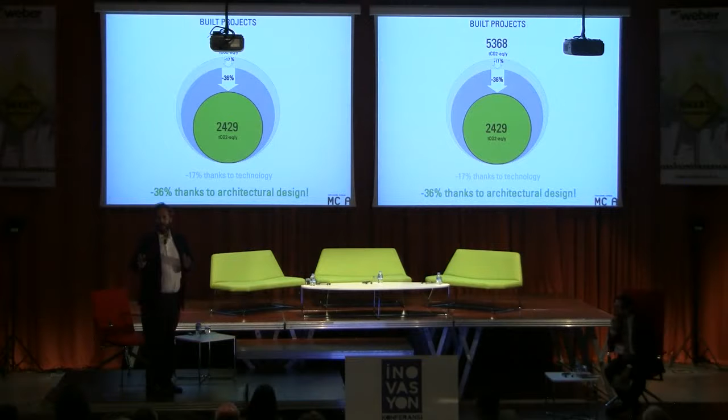Remember how buildings were built in the fantastic period of 1980? Architects completely forgot the knowledge of how to build in relation to climate, because the dream of technology was that you could put in an air conditioning unit and have any kind of climate you want inside, whether outside is hot or cold. Architects in that moment lost 1,000 years of knowledge of building in relation with climate. Totally lost. And the result was a very, very expensive bill in the last 30 years, because buildings are unsustainable.

In the work we did in the last years, I tried to define a few things. Creative empathy was a very important key for me, because with empathy you put yourself in relation with a place—you try to understand where you are, what you're doing. Creativity is a tool, very important, but be careful, because creativity can become extravaganza, strange things, and we don't need this. We need a very high quality in creativity, but we need this creativity to be very empathic with the place.

So we define three elements: low-tech, high-performance building; bellezza, which is—I'm sure you know Italian—beauty; and vernacular innovation. This is another key point for me. Vernacular innovation is a paradox, because you say vernacular architecture, what do they have to do with innovation? I'm going to show you something very interesting. And building as a catalyst for social change—so the responsibility of architects in relation to social change.

In terms of what I call low-tech, high-performance, these pictures show exactly what I'm looking for. You can see this is a guy walking with a camel, but if I change the point of view of this picture, this is not only a guy—this is a doctor with a GPS antenna for satellite connection. This is a PV cell, photovoltaics, to produce electricity for a battery, and the battery supplies energy to a fridge. This is a combination of what I like to think will be the future of innovation.

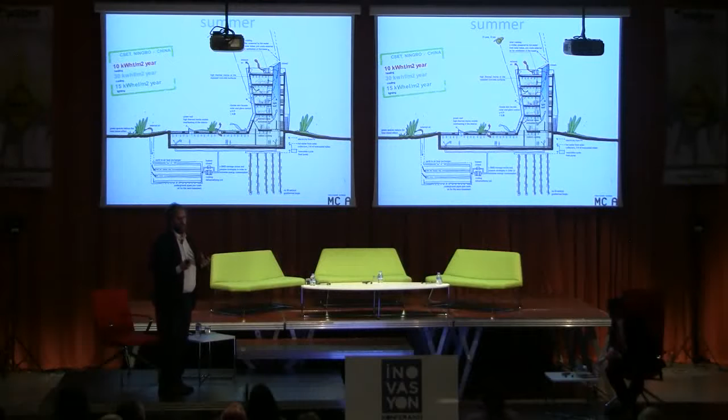And the floors, because we want to create this stack effect, this chimney system. In the summer, we're dehumidifying the air, bringing it in, and the cool air comes in and goes inside the room and out of the windows, and we're using the thermal mass of the building, using low temperature to keep the building safe in terms of temperature around you, and using ventilation.

And of course, in the wintertime, we always want to use thermal mass in the floor, invisible. Using the system of ventilation, because we're using the hot air on the double skin, cross ventilation, and using this as a chimney, and the same technique on the floor.

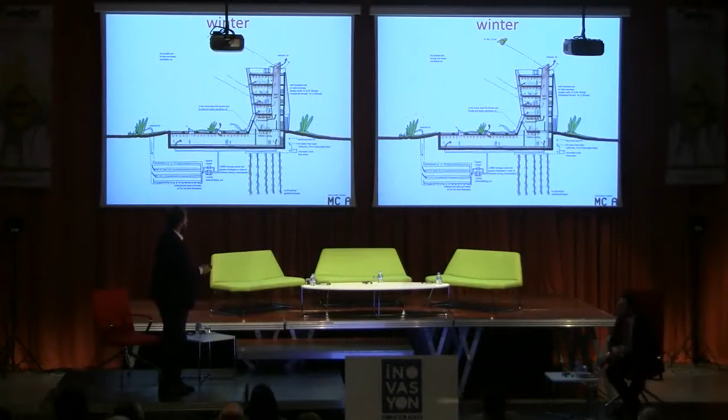And this is done in China, one of the fastest economies on the planet, to show that if you want to do sustainable building, you need to start first thinking about which kind of technique combines with the climate. And of course, the shape of the building matters quite a lot.

A few years before, I did this for the Minister of Environment in Italy and the Minister of Science and Technology of the People's Republic of China. I presented this as my building. This is the building, it's leaves looking on south.

The first sketch was done to show that this is a building facing south. We are in Beijing. Beijing has a very, very cold and dry weather in the winter, and is very hot and humid in the summer. So in the wintertime, we want to keep the building protected from the north, from the wind coming from the Gobi Desert.

So the north face of the building was a wall, like a shoulder, and the south was like steps with gardens, open to the south to get as much sun as possible in the wintertime. And of course, we worked and also researched ideas.

Now, for me, the landscape and nature is not exactly what the Indian guys said before. I mean, nature is a good reference, but for me, it is also vernacular architecture and definitely landscape. This is a human landscape.

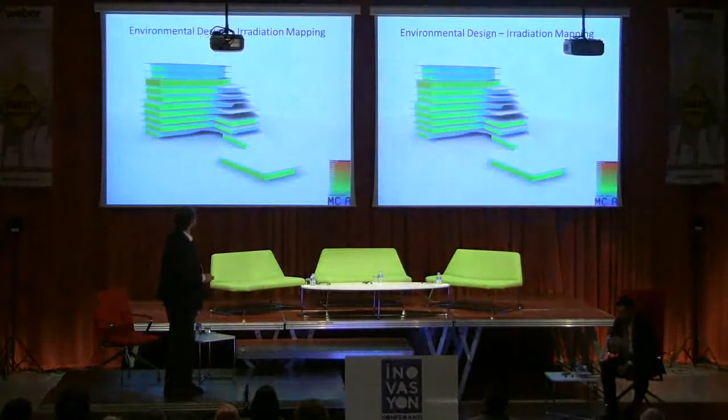And of course, architects alone can only do part of the work. I think it's very important that architecture is well integrated with engineering. So I never find engineering and architects to be a problem - I always find a very high level of complicity, because we need a good engineer and the engineer needs good architects. That's the point - there are two different jobs, and that's fundamentally how you work with them.

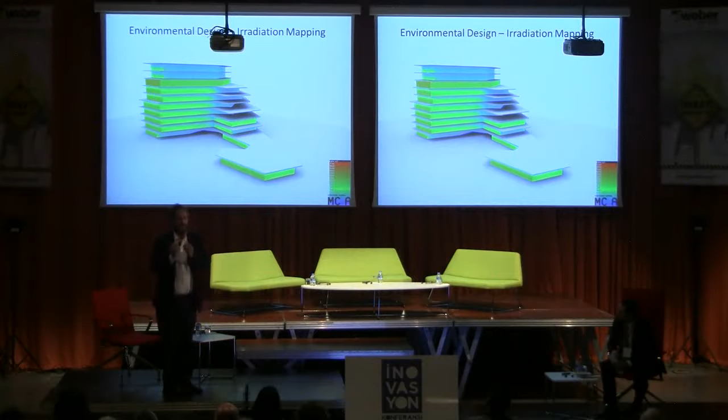Working with environmental engineers is very important, because they analyze things, they help you find solutions. And I always say engineers are very good, but sometimes they don't know they've done something very good, because they talk technically, and for me it's an inspiration for creativity - because I don't know what they're talking about in detail, but for me it's an inspiration to do something else.

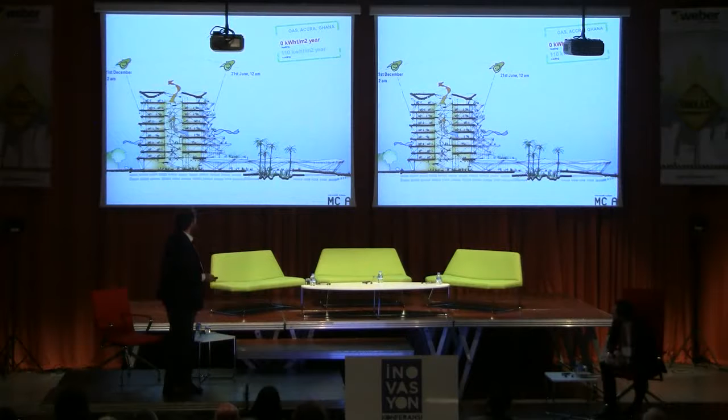And of course, we don't have heating problems. There's no heating system, only cooling, and the cantilever system reduces cooling demand by 50%, because there's no solar gain - no heating, no sun coming into the building.

There's the patio, and of course it's not enough, but it's still a significant amount of energy reduced, and I reduce the size of my services - everything comes scaled down.

And I'm doing this right now - I'm in the final drawing stage before Christmas. This is a military camp close to the city center of Aosta.

We are in the Alps. You see, this is Aosta - it's a little city, a Roman city, and here is a Roman wall with internal gardens, and this is a camp. So we demolished these two buildings and rebuilt them as academic buildings.

This one, they will come out. And instead of those two heavy military buildings, we're going to build this very soft, like a piece of ice, a melting ice. And that's the square.

This is driven by regulations. There are two elements for the change: one is the market, another is the regulation. Depending on which is strongest at the moment in the market.

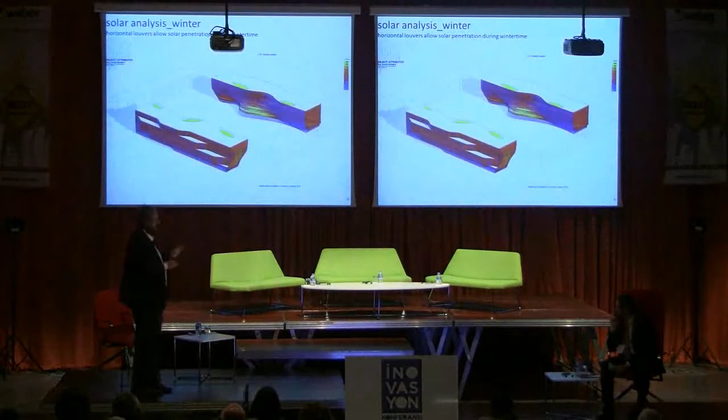But there's no choice. I'm always surprised when people think they're going to make buildings like before. There's no choice. The market will be severe, and regulation will be more and more difficult. So it's better to start thinking about change. And this is a reality - I'm not talking about something happening in 30 years. That's going to happen now.

These are study models, and the idea is the inside of this space is like being inside two pieces of glass.

This is an example - a building for BNP, the Banque Nationale de Paris. The first thing they asked me was that this building needs to follow all the national and local regulations, but also be certified for the French standard because they're French. Unfortunately, I was living in France for 10 years, so I know what this means. But that asks a professional for another level of competence - someone comes to you wanting a building with this kind of certification.

It's not part of the local rules, but you need to be able to answer the question.

You can see this is the facade on the southwest, and it's all in glass. You can see the detail here - it's a double glazing with a small solar protection system inside, which moves in relation to the sun.

The other facade is more than 50% opaque because we're facing the problem of needing high insulation inside the building. Buildings need to be at least 50% opaque to reach a good standard in terms of energy performance. You cannot make an all-glass building - it's impossible to get a good energy performance standard.

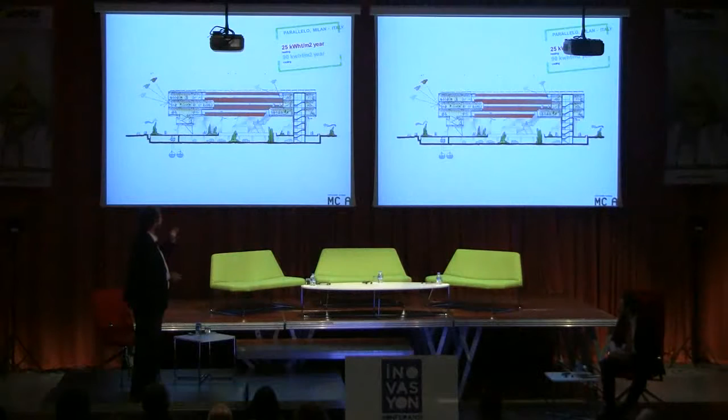This building is interesting because the client fulfilled the requirement, but then they put on the top floor - the roof is all photovoltaics - to reduce the building's emissions by 100%.

Of course, this is a choice - a choice of shape. If we decided to make a tower, it would have been impossible to fit enough photovoltaics, so we decided to work in a horizontal way.

I want to tell you a little story - I have another 5 minutes. I want to tell you a story about what I call vernacular innovation. Behind my work and your work, behind us, there's 2,000 years of history of architecture. Don't forget that - 2,000 years with no electricity, because electricity, heating, cooling is maybe 100, 150 years old. The other 2,000 years, there was nothing. And architects was...

The knowledge of an architect was very important because he was able to deal with climate and find good solutions through innovation. That's why vernacular architecture is important. It's not a nostalgic view—I'm not nostalgic, I'm looking at how people...

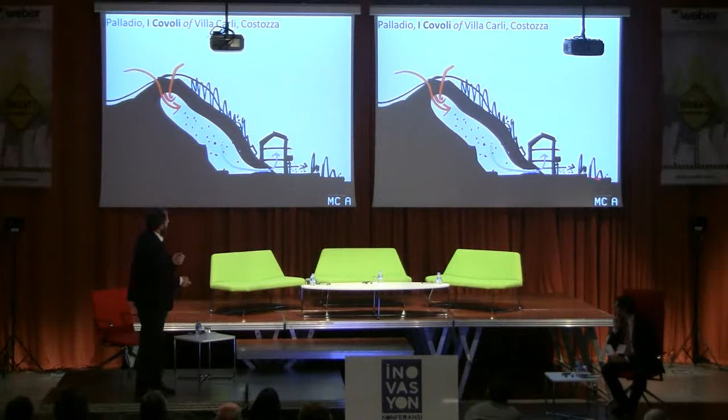There was also a series of gardens stepped down, because this air was more humid, fresh and heavy. This air came out in the main room but also went down to the garden. Ladies at that time wore big vests, and they felt this air come through their legs and thought something exciting was happening—like a ghost touching their legs. But in the end, the story was that there was an air conditioning system driving air through the building and through the gardens. That's what I find interesting.

This is just one example. There are many examples of this kind of thing.

We are under construction of this building, the Agency for Environmental Protection. It's built with ideas of form and performance—there's a relationship between the shape of the building and its performance. It's done in Ferrara, close to Bologna and Venice. It's one floor, and this is the roof, optimized for lighting and increased ventilation. It's a wood construction—the foundation is just a platform, and everything else is prefabricated wood.

For working with these ideas of sustainability, we use digital tools—there are many programs, but also laboratories. This is a laboratory called Artificial Sky. You bring your models under this machine, and it analyzes the lighting inside your building. You can change elements, colors, different textures, and see how the lighting changes in terms of quantity and quality. This is very important—lighting in a building is everything.

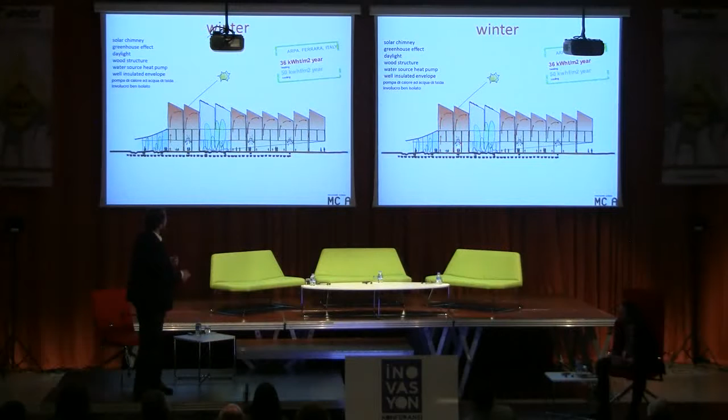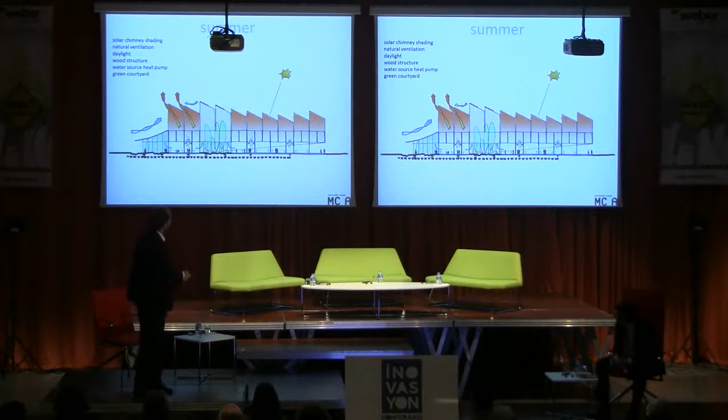So how do these buildings work? It's not enough to make a free-running building, but in wintertime we use this chimney—you can see it's very high, 8 meters. The chimney acts like a glasshouse, making the air very hot, and with a fan we mix the air to reduce heating demand. In summertime we open the grid, and it gets much hotter at the top, working as a chimney—air goes out, driving air from the bottom through the building and increasing natural ventilation. The result is an 85% reduction in CO2 emissions.

Then we have a system for cooling and heating through the floor, and a bit of ventilation, but that's mainly achieved through the shape of the building.

I don't work too much on residential buildings because in Italy residential building is mostly done by contractors, who want to do the same things—they don't need an architect, they do it themselves. But I was very engaged with the idea of social housing problems. In Italy, and I suppose in Turkey it's not much different, there are 5 million families who cannot buy or live in a house because affordable housing is very difficult—they only build residential buildings for the speculative market.

There's very little work on social housing from the government, so nobody's going to make social housing. So we did a simple project called the 100,000 euro house. Now you can buy 100 square meters for 100,000 euros. That's your price - it's low cost, a dream home, and low environmental impact.

It's a long story, but I'll try to be short. The organization of the family is very different today - you can't define yourself as a typology, just two rooms, a corridor and a bathroom. When you talk to your friends, you say I want a living room, a little kitchen, or a big kitchen. So the market proposes typologies, the construction industry proposes typologies, and the market asks for different houses - these two things don't match.

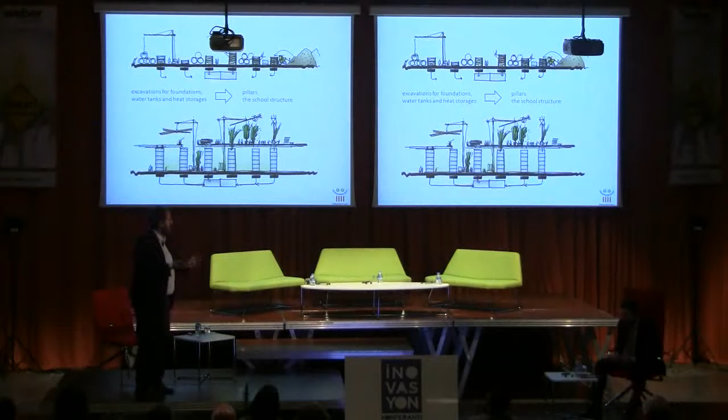This building collects water from the roof—we gather all the rainwater and store it in a cistern. Using a system of hollow columns, we fill them with water, creating thermal mass for the building. This is important because the night wind in summer is cool, and the building has the capacity to absorb this.

And then, of course, some decoration. You can see the garden—but this isn't just a garden, it's a system for cleaning water. We recycle 80% of the water inside the school using simple techniques.

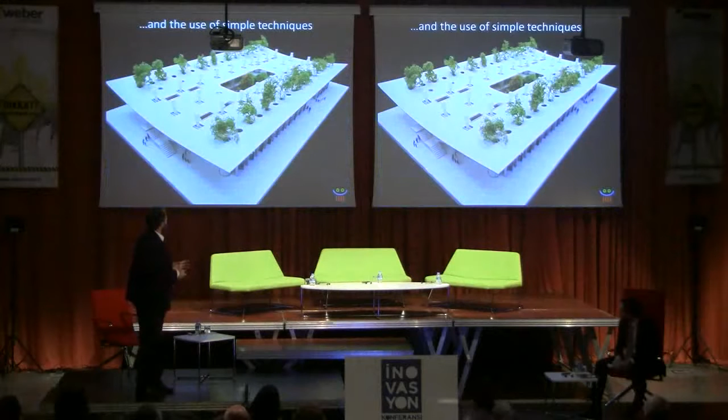That's what I mean by vernacular architecture—I'm not being nostalgic. In this building there isn't a single machine, because there was no electricity, or very little during the day. In winter we use a system with a channel in the ground at the foundation that brings air into the building, since the earth stays between 17 and 18 degrees, warming the air. We also added a small heating system powered by solar panels.

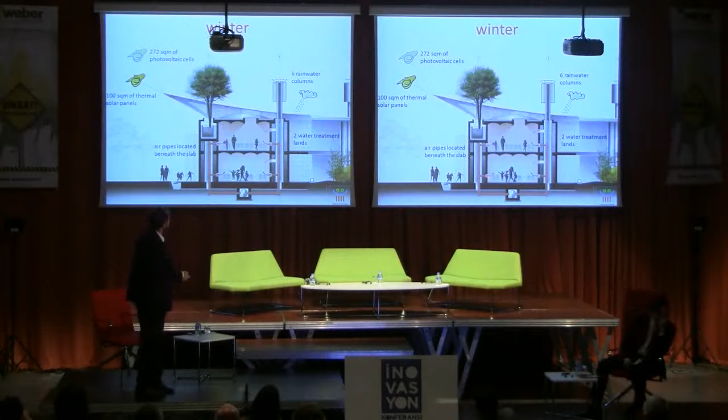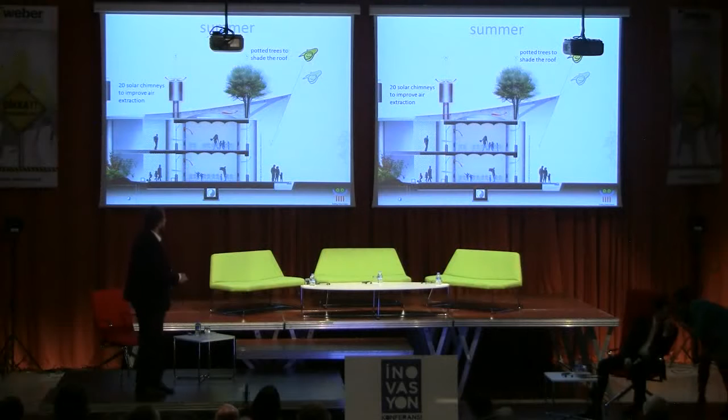In summer, we increase ventilation using a solar chimney, which sucks air from the ground, increasing airflow and reducing temperature. The result is a 4-degree difference inside the school, with no machines, no air conditioning—nothing.

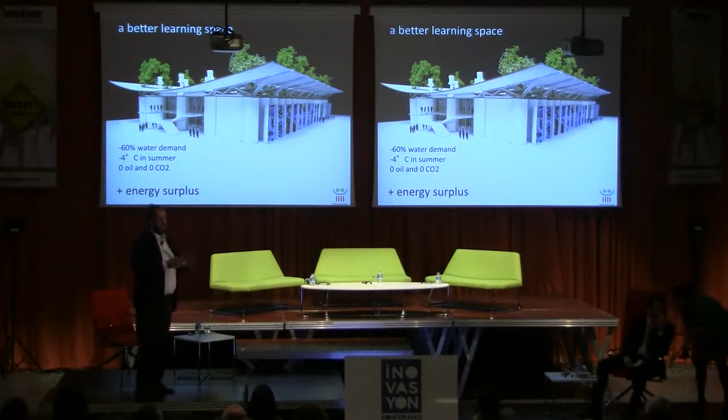For me, innovation is hard to define, but I believe innovation lies mostly not in the product, but in the knowledge. And of course, the school can produce energy with photovoltaics, and the water system creates a kind of small smart grid—that's what this is, a smart grid.

I'll finish with a one-minute story. Does everybody know Marco Polo? He traveled around Asia, passing by the Black Sea, and in his book he tells how he went to Persia, a large region. To welcome him—since they had never seen a white man before—the people gave him an ice cream.

So how were the Persian people in 1274 able to make ice cream in the middle of the desert? There was no electricity, no fridge. And how did they build it? They built a structure with a big wall, shaped like a large sea wave, about 100 meters long.

And a little pool here, just a few centimeters, and people walking for days to find water, on the mountains, on the rivers, they're coming back. They're excavating this cistern and covering it with a dome here. They put it in the winter time, this wall protects from the solar gain, because the sun is lower, and there is never solar gain during the day. So this pool will be kept cool.

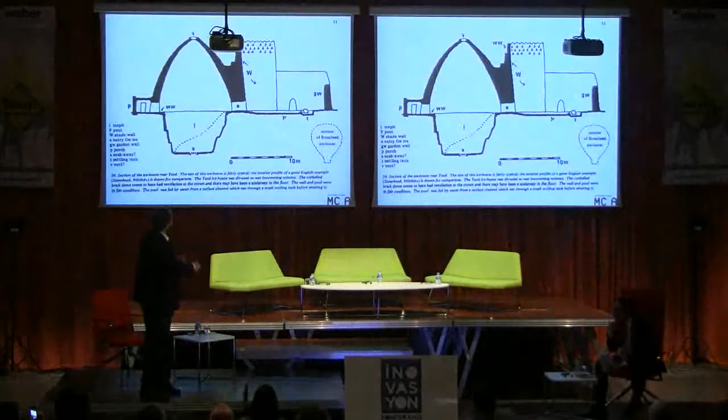And in the night, every night, the frozen layers of water, they stock here with straw. They make it full. This ice freezes the earth, and in the summertime, this system ventilates, and this dome is protected from the solar gain, because the heat of this will be the air, the ventilation out of this hole is ventilating and avoiding the heating system inside.

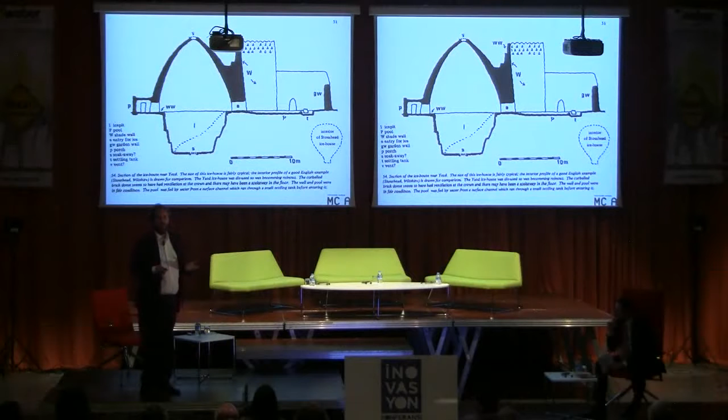And the Persian guys were able to make ice cream in 1274 in the middle of the desert through a building. So I'm saying, why, if they were able to do this without technology, nothing, why are we not able to make a sustainable building? That's impossible not to do. Thank you.

Is there any question for Architect Cucinella? We have time for just one question if you want. No? Be brave. So we can leave you free. Thank you, no problem. Thanks again. Thank you. It was really interesting. Thanks, Mario. No, c'è nessun problema.

Okay, I just want to conclude very quickly. I want to thank you all. I think we all learned three main lessons today about innovation. Oh, sorry, there is one question. Mario? Yes, yes, there's always somebody.

Fatma Özberki. Thank you very much. My question is how you will assess all those green LEED, BREEAM certifications that do not have that common sense that we are seeing, historical common sense. There is a try, but without valorizing the past. How do you assess it? I'm trying to understand better your question. How can I mix this, or how are you valuing the LEED, those certification systems that are not always related with the historical knowledge.